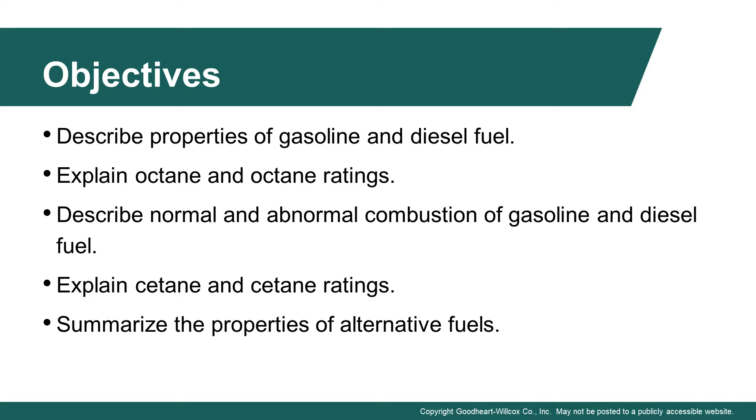So fuel, what is this stuff, right? Automotive fuel is any substance that can be burned to produce heat energy, and almost any substance will burn and give off some kind of energy. It could be a liquid, a gas, a solid. You can think of different examples of this as liquid gasoline, and then some of the explosive materials that we're even aware of, not that we run many cars off of dynamite.

Most passenger cars burn liquid gasoline. This is the most common method. And then we have quite a market that consume diesel fuel. We have a large trucking industry that operates on diesel. We have something called Gasohol, and we have alcohol and other alternative fuels, such as you might have heard of propane, for example, that some vehicles are powered with.

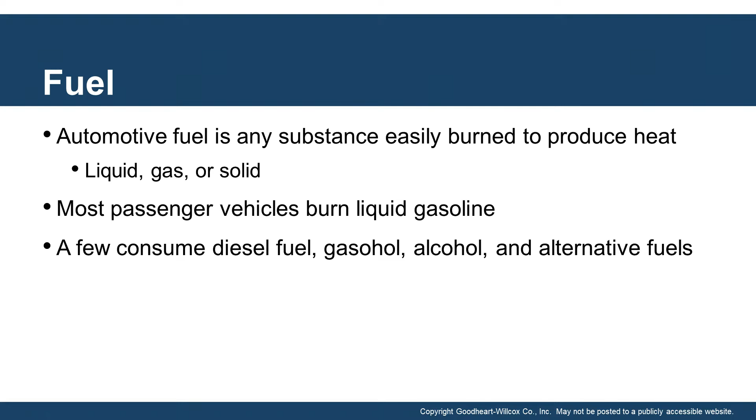There are three main areas that we want to focus on, and the first one would be combustion, and that's that reaction that occurs when the fuel is burned with an oxidant, or oxygen in our case, and this usually happens in that combustion chamber. Now there's normal combustion, right, which is primarily a factor controlling good fuel economy. The best normal combustion usually means we're getting the maximum power out of whatever we've used as a fuel source.

And at the same time, we want to have low exhaust emissions that can also serve a long engine life. We don't want to use, like I mentioned before, dynamite as a joke, but honestly, while it gives off a lot of power, it would be hard to control and would be damaging. There is abnormal combustion, and that occurs when combustion happens either too quickly or too slowly. And you might have heard this before about cars that make these funny noises, sometimes referred to as pinging in some cases.

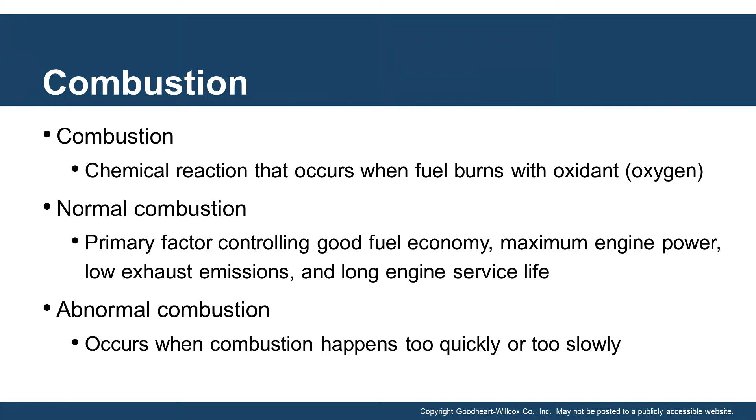The next part that we need to talk about is combustion efficiency, and that's a measurement of how well combustion consumes the fuel's heat energy. For maximum cylinder pressure, right, we get that propulsion down the road, but we want the minimum exhaust byproducts, which cause pollution, which obviously in California is a big deal.

Understanding the factors that affect this proper fuel combustion to isolate many of our vehicle problems is a fact that most technicians need to deal with. Being able to understand what the different exhaust gases tell us a lot about what's going on in that combustion chamber, whatever's coming out the back, right? Sort of like that garbage in, garbage out. If we got bad combustion, we're going to have bad pollution.

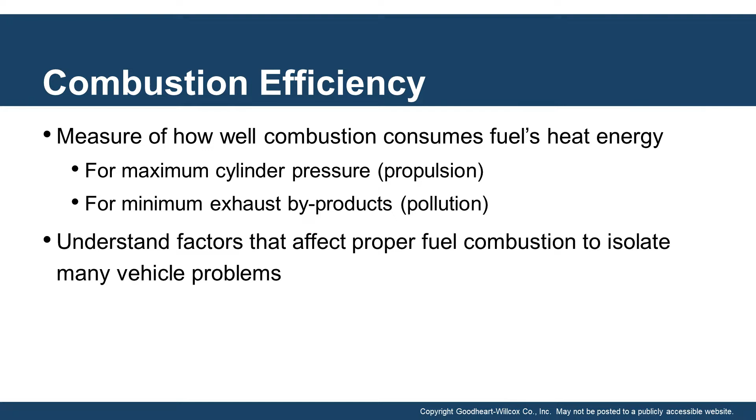So let's talk about our most common type of automotive fuel, gasoline. Gasoline is highly flammable. I'm sure that most of us have had some experience around gasoline. And on top of its flammable characteristics, we have to try to control that. And we do that by using what they call anti-knock additives. And these are designed to slow down the burning of gasoline and help prevent engine ping or knock.

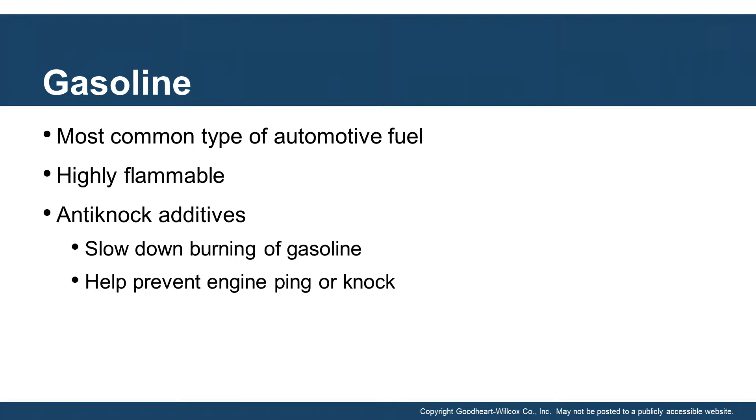And this is where that octane rating comes in, because this tells us a lot about how, I guess, volatile the gasoline is, if it can be controlled to a certain temperature. Obviously, the more additives that we put in, there's an additional cost associated with it. And this brings us to the gasoline octane ratings that we need to understand.

So there's an octane rating, and that's the measurement of the fuel's ability to resist knock or ping. And the octane is one of several flammable hydrocarbons that forms during the refining process. High octane gasolines resist knock and they resist ping better than gasoline with low numbers.

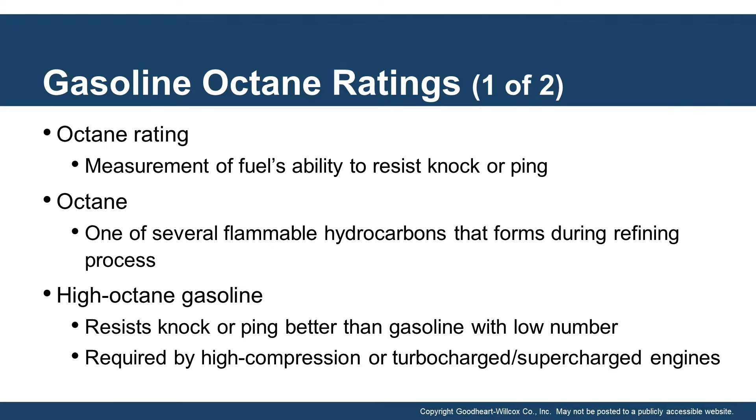So it's required by high compression or turbocharged, supercharged engines, because as we increase pressure, especially in those turbocharged and supercharged, we're going to increase the temperatures, and those temperatures can cause gasoline to go off at different levels. So the higher the octane, the more certain we are at what temperature it will burn, versus a low octane that may go off at a lower temperature or a higher temperature and can cause problems within the engine itself.

So those low octane gasoline numbers that we see here, those are suitable for normal compression, high efficiency engines. Automakers will recommend the specific fuel octane ratings for each vehicle. And really what that's doing is it's trying to help us control where that flame will go off.

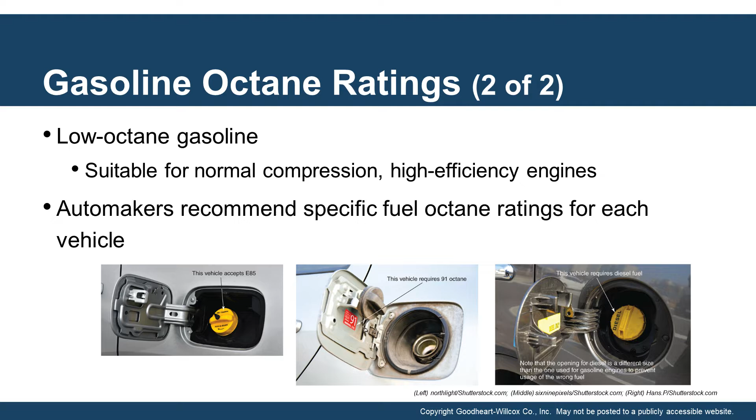In other words, we use a spark plug, but if we've got too much pressure and the heat elevates higher than that, that gasoline can go off before we get to top dead center, which is going to adversely affect our ignition timing. We may be trying to hit a certain point where we want the gasoline to be ignited, but it may unintentionally be going off sooner than what we wanted, or it may not even be burning as hard as it should. This is where that octane rating plays such a critical factor in what the vehicle was designed to operate on.

Another important part of the gasoline combustion process is how gasoline must mix with the right amount of air to burn properly. You'll often hear this as a stoichiometric ratio. And this is basically 14.7 parts to 1. But what does that mean? That's 14.7 by weight to 1. So in other words, 14.7 pounds of air to 1 pound of gasoline.

This is a volatile air-fuel mixture that must be compressed, pressurized, and then ignited. This creates the perfect storm for this fuel mixture to go off, resulting in combustion or a rapid oxidation that produces heat and the expansion of gases and ultimately engine cylinder pressure, which is what gives us that propulsion down the road.

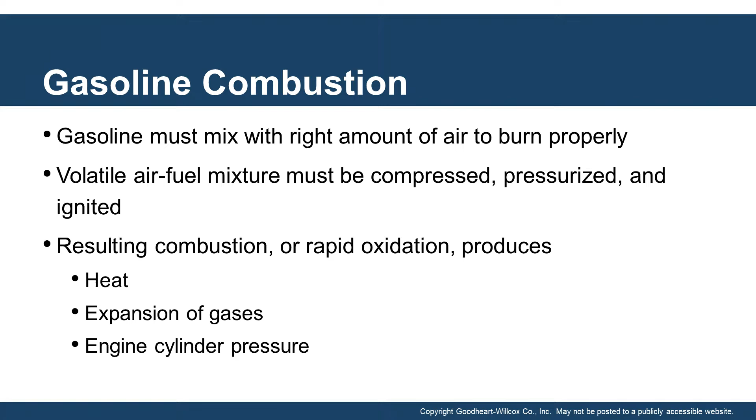Normal gasoline combustion happens when the spark plug ignites the fuel and creates the burning process. We've got this pressurized air-fuel mixture, and we light it off with this quick flick, very similar to a Bic lighter, but under a lot more pressure. It takes only 3/1000ths of a second to start this ball of flame rolling, and that gradually expands as it burns more of that air-fuel mixture as it comes up to TDC, which is going to be timed at the perfect point to push down on that piston.

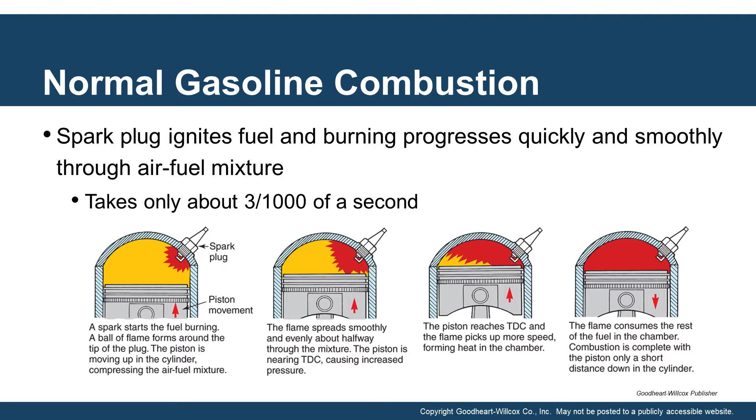You'll find that some cars actually will fire this spark plug up to 3 to 4 times in one cycle just to constantly be lighting off that flame, especially noticeable with direct injected gasoline engines that you'll learn about later. Those fuel injectors are able to keep adding fuel during the whole power stroke, which is why that makes them so incredibly strong for pushing vehicles down the road.

This air-fuel mixture is that stoichiometric fuel mixture I was discussing. This is chemically correct. This is that air-fuel mixture that we're looking for. And for gasoline, that's 14.7 to 1. 14.7 parts air to 1 part fuel by weight. Always remember that it's by weight.

A lean air-fuel mixture is a large amount of air compared to the amount of fuel. So if we had 15 to 1, that's more air than what's desirable. If we had 16 to 1, that's even more air than what we want to fuel. A rich air-fuel mixture is a large amount of fuel compared to the air. And in those numbers, maybe we see 14.7 to 1.8 or 14.7 to 2. There we've got too much fuel for the air mixture, and that's not going to give us the best potential power or efficiency out of that cylinder.

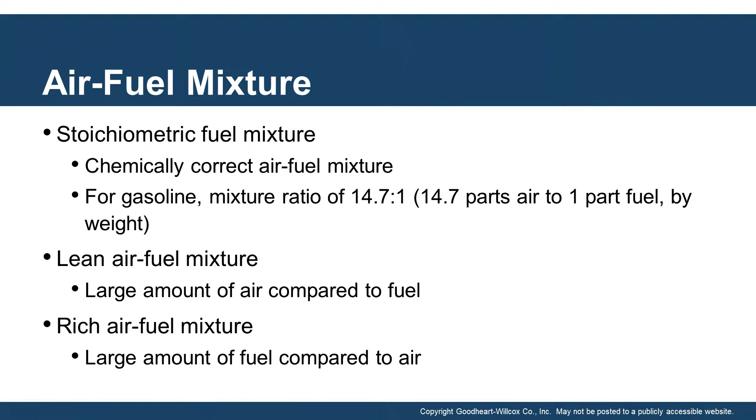Let's talk about abnormal combustion for a second. There's a lot of things that can lead to this, but this abnormal combustion happens when flame does not spread evenly and smoothly through the combustion chamber. This is particularly problematic with those low octane gasolines that can have variations in the fuel quality.

This problem is made more common when we're dealing with lean air-fuel mixtures, especially with direct injected. This is a very difficult thing to control, which is why we use such a high pressure fuel system in direct injected vehicles. There's high operating temperatures that'll also lead to this. When we have too much temperature in there, we can have pre-detonation.

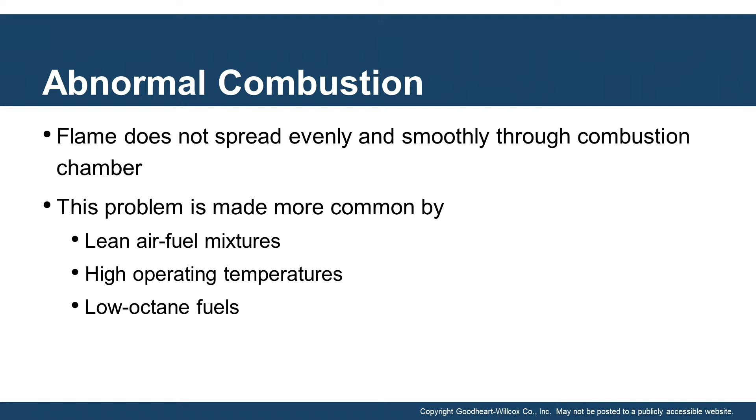These low octane fuels, I already mentioned a couple of times, but I can't stress enough how they are usually a culprit to some of this pinging and detonation for most vehicles that just aren't designed to run on it. You'll see detonation happen when a part of an unburned air fuel mixture, the end gas, explodes violently. This could happen at any point, and the engine knock is a symptom of detonation.

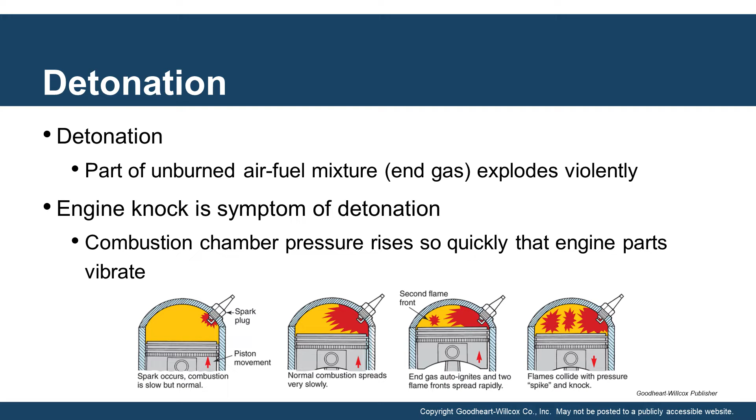That knocking is because in one part of the piston it has ignited harder than it should have and caused the piston to rock within that cylinder bore. That combustion chamber pressure rises so quickly that engine parts vibrate because of that abnormal detonation going on. This detonation can get so bad that it can damage components within that combustion area.

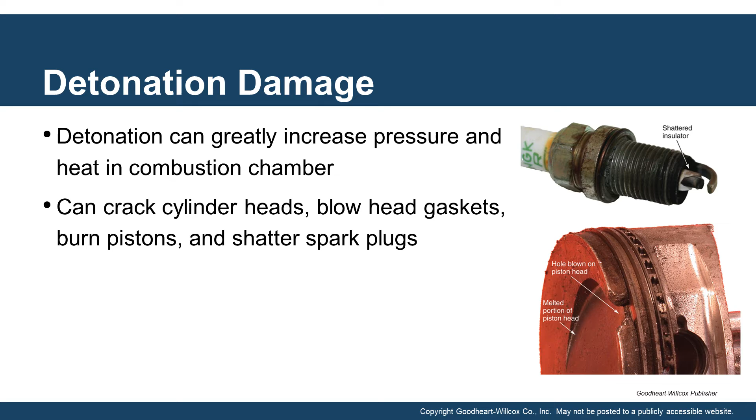That's a greater increase of that pressure that happens, and the heat in it exceeds the design tolerances of that vehicle. It can crack cylinder heads, it can blow out a head gasket, it can burn pistons, it can even shatter the spark plug ends. So it's important that we pay attention to this detonation to prevent this kind of serious internal engine damage from happening.

Preignition or surface ignition is another condition that we need to be aware of. This is usually caused by those overheated surfaces in the combustion chamber that ignite the air fuel mixture, especially if there's carbon buildup on the top of the piston head. This carbon acts much like a piece of charcoal in the grill and will stay there glowing as fuel is being injected into the cylinder. And while that stays hot on the top like a piece of flickering ash in the air, it's just enough to light off that fuel mixture.

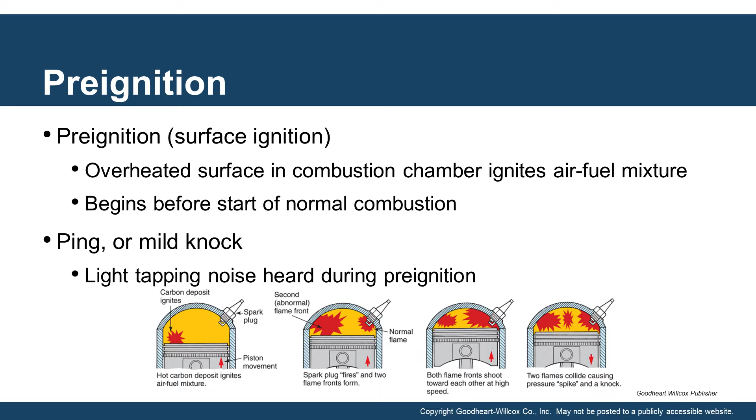And this causes that whole combustion cycle to start before it should in normal combustion, which can lead to this pinging and knock or light tapping noise heard during pre-ignition. This can also result in what we call high NOx values for pollution. So something to be aware of is that carbon buildup is going to increase pressure in that chamber and therefore create heat.

We also have something called dieseling. Dieseling is when you shut an engine off, it's called run on. It keeps running. It may run and shake and shut off harshly. Some cars won't shut off at all. The engine keeps running after the key is turned off, and that's because the gasoline engine ignites fuel from heat and pressure that's already generated.

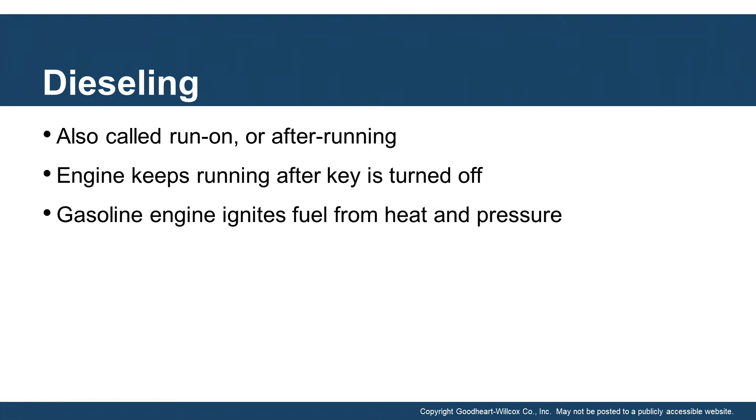They call it dieseling, even though it could happen on a gasoline engine. That doesn't make sense because a gasoline engine doesn't run on diesel. Well, dieseling happens because the top of the cylinder head has gotten so hot that when a little bit of fuel gets in, it lights it regardless if the ignition spark has been shut off or not. And that's how it gained that term dieseling, because it starts to sound very rough like a diesel engine.

We also have another condition called spark knock, and that's when spark timing that is too advanced causes combustion pressure to slam into an upward moving piston. So this piston's moving up, but the combustion process has already started and is starting to push back on that piston that's coming up, and it really wants to be on the downward swing. That causes pinging under load and is actually fighting the system as far as efficiency of moving the car down the road, because you've got cylinders pressing back against other cylinders because it's starting too soon.

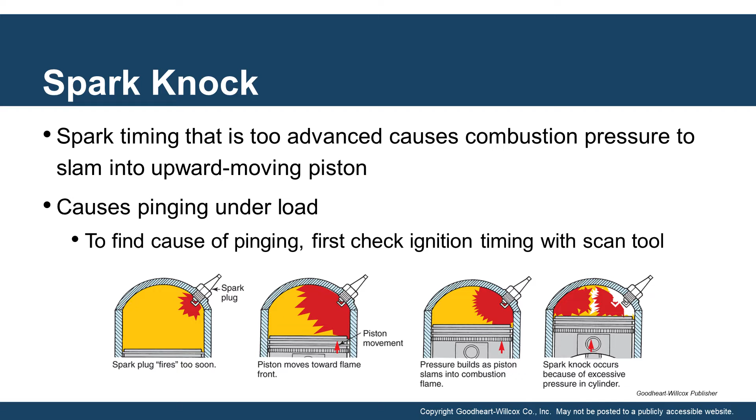To find causes of ping, we first need to look at our ignition timing with a scan tool, and we have to see, is there some reason that this should be starting early? If we see that our timing's okay, we may want to look at something else, maybe that carbon buildup that's holding that contained heat and therefore resulting in that pre-ignition. While this is not as common as some of the others that we've talked about, it does indeed happen if the timing is incorrect.

Diesel fuel is thicker fraction of the crude oil, right? And so a gallon of diesel fuel contains more energy than a gallon of gasoline. There's a tremendous amount of energy in diesel fuel, but it doesn't vaporize as easily as gasoline, and combustion requires fuel to be in a vapor state. So in order to do this, we usually have to use a high pressure injection system that sprays the fuel into the combustion chamber to force this thicker fluid under high pressure to atomize in the air so it'll actually burn better. Actually, if it was too thick, it would not light.

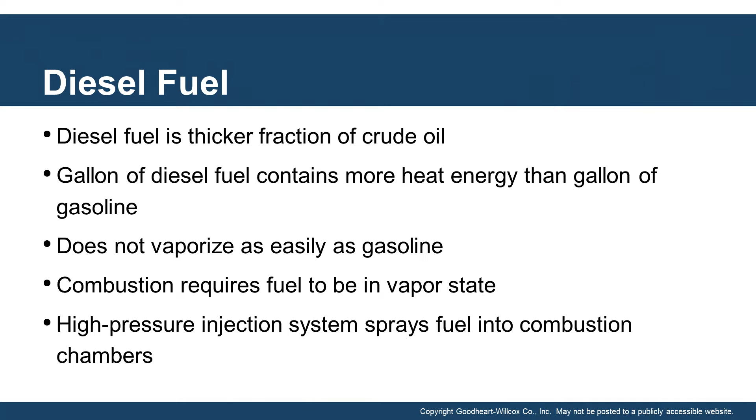And you can imagine this. It's the same thing with gasoline to an extent. You could have a fire in a puddle of gasoline, but it's actually the vapors that are super dangerous that light for us.

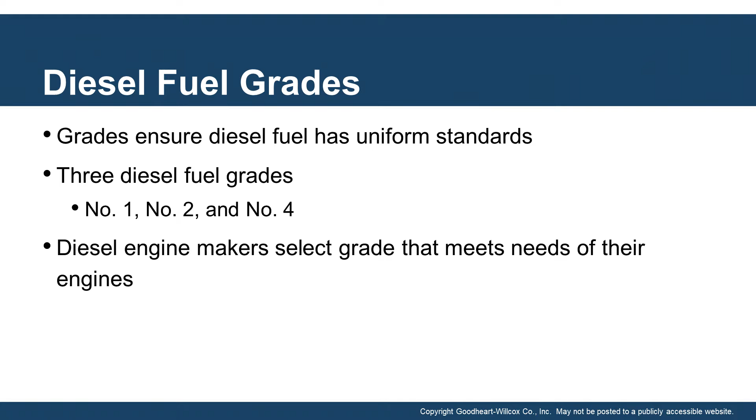Now, when we talk about diesels, diesels have some similarities to gasoline in that they do come in different grades. Grades ensure that diesel fuel has uniform standards. Three diesel fuel grades: there's number 1, number 2, and number 4. Diesel engine makers select the grade that meets the needs of their engines. It's very important that we pay attention to vehicles that are diesels and we use the proper diesel fuel for that vehicle to keep it in best operating condition.

Something to be aware of with diesel fuel is what they call a cloud point. And this is a paraffin wax. That's a substance that is in diesel fuel. And at very cold temperatures, the wax can actually separate from the other parts, and the fuel will turn this cloudy or milky color. That cloud point is the temperature at which the paraffin separates from the diesel fuel. And this is an important factor, especially if you live in a cold climate.

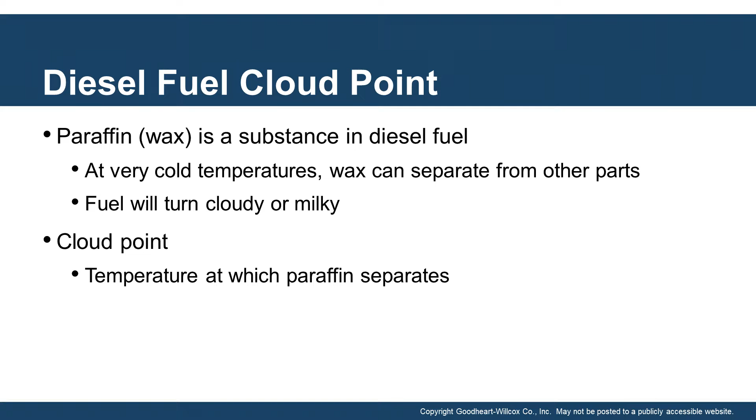Another factor to be aware of with diesel fuel, although it does happen with gasoline as well, is water contamination. The water contamination is common with diesel engines, and the water mixed with the diesel fuel can clog the filters and actually causes corrosion of components. These vehicles will typically have a water separator that prevents water damage, used on many late-model diesel systems.

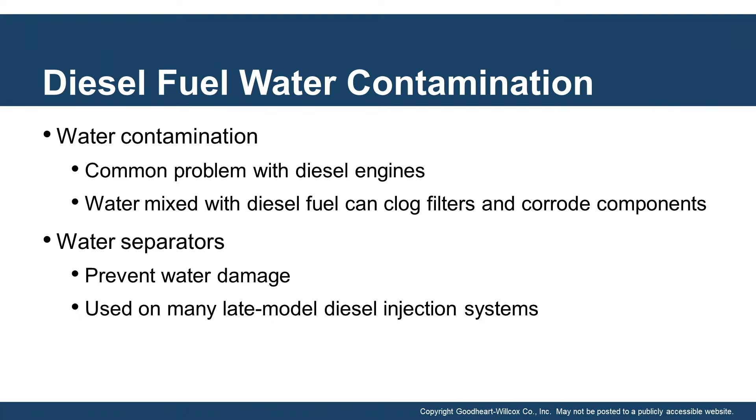One thing to be aware of with this is that fluids like water do not compress. And if you get too much water into a cylinder, you can do something that's called hydrolocking an engine. This can be very dangerous because if fluids don't compress, something's going to give, and this usually will lead to total motor failure of some sort. There are substances that we can add to both gasoline and diesel vehicles to try to help with this water contamination issue. But just be aware that this is fairly common with diesels, and we have tests for it as well.

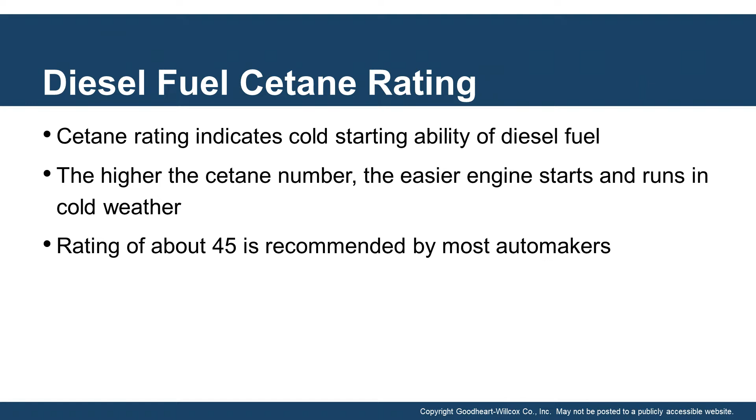There's also what they call a cetane rating that indicates the cold starting ability of diesel fuel. Now, diesel fuel, because it's thicker than gasoline, when it cools down, it acts very similar to oils, which themselves get thick in cold weather. So the higher the cetane rating number, the easier the engine will start and run in cold weather. This can be extremely important with diesels. It's also very important when we're dealing with diesels that we're looking at the oils that we're putting in them, because normal oils will act up in cold weather and create a very tough condition for diesels to turn over. A rating of about 45 is recommended by most automakers.

So diesel combustion is quite a bit different than that of a gasoline. Compression ignition is what we call the engine that compresses this air until it gets hot enough to ignite fuel. The diesel fuel is thick and difficult to ignite, so we want to put it under high pressure to cause this atomization. The fuel is forced into the combustion chamber through this direct injection process, and this extremely high compression ratio heats the air in the cylinder. The fuel is sprayed into the hot air and begins to burn immediately as it sprays into that diesel engine.

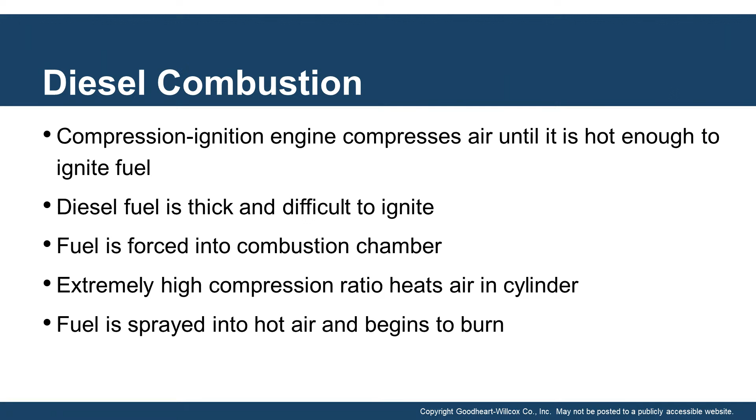This is sometimes a difficult concept to understand, but when that amount of air is put under that kind of pressure and friction and it's compressed and you're adding that fuel, that's going to cause heat. Anytime we have pressure, we end up having heat, and that is going to cause items to combust to some extent.

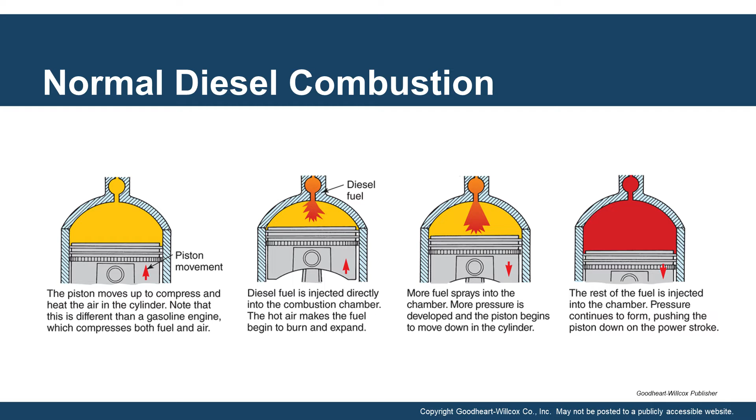Now, when we look at the process of the normal diesel engine, you can see the piston moves up and it's compressing and heating the air in that cylinder. And in this case, we have a little ball at the top. And that is where the diesel fuel will slowly be squeezed out into the combustion chamber. And passing through that orifice creates this heat. That fuel, as it comes down into the combustion chamber, will start to ignite and therefore will start to build up pressure as it expands and burns.

One of the newest items that we've seen in the development of diesels has to do with what they call a selective catalytic reduction system, better known as an SCR cat. That automatically sprays diesel exhaust fluid, often referred to as DEF fluid, into the exhaust system. This is a mixture of urea and deionized water. And the catalytic converter breaks down toxic NOx emissions by using this deionized water and urea solution. The rate of the DEF consumption is termed what they call a dosing rate.

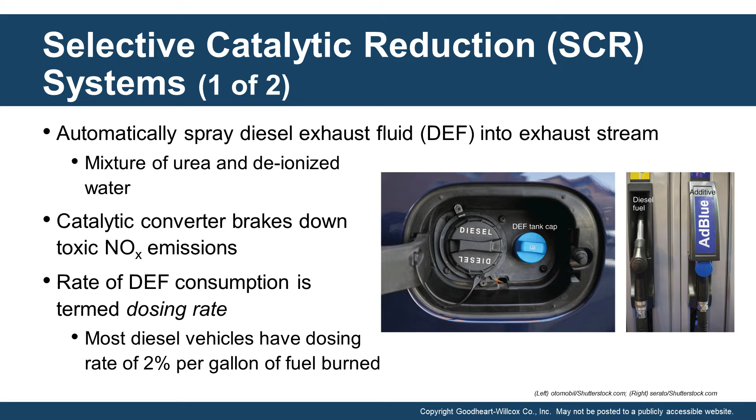That's how much actual urea and deionized water is being entered into this SCR catalyst. And it's often referred to as burn off. Most diesel vehicles have dosing rates of 2% per gallon of fuel burned. So something to just be aware of. Typical maintenance will require that we fill this.

The EPA requires vehicle manufacturers to install safeguards to monitor this system. When DEF fluid is low, a warning indicator illuminates, and it can actually limit the amount of starts that you have and tell you you've only got 20 starts until the vehicle won't start anymore. So they take this pretty serious.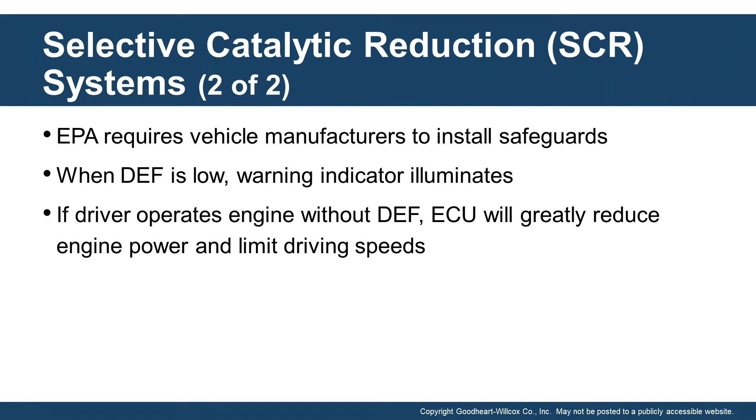If the driver operates the engine without the DEF, the ECU can take action. It can cause a significant reduction in engine power and even limit the driving speeds. And not only that, there's cars that simply just will not start until that has been filled and set. And that's to prevent people from skirting the law, let's say, and not adding this fluid to reduce those NOx emissions.

So gasoline and diesel we've kind of gone over, but what about some of these alternative fuels? We have a lot of different fuels that have been tried. We've got liquefied petroleum gas, we've got biofuels, we've got hydrogen vehicles, there's fuel cell vehicles. Propane was very popular. Obviously, we all know electric vehicles are growing. There's natural gas and what they call P-series fuels. All of these have some application that have been experimented with to try to find the best model for the longest efficient use of fuels.

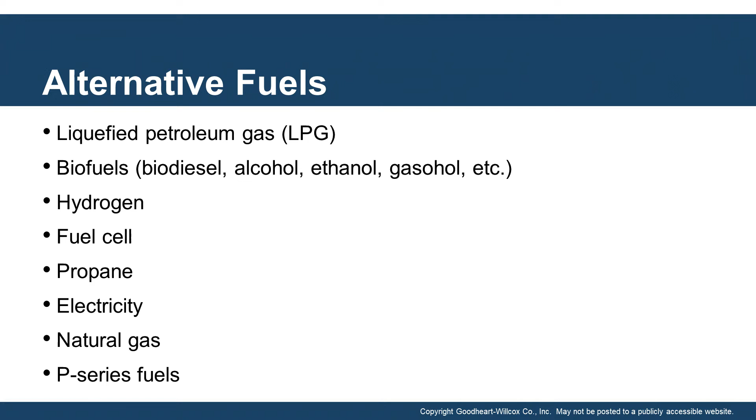We've seen a lot of things where corn alcohols for a while were very popular. And then sometimes they were developed as far as they could be, and they just couldn't get the efficiency out of them that was desired. We're still seeing a lot of growth in the hydrogen industry along with the electric right now.

The liquefied petroleum gas was very popular for a period of time. This was used in a lot of our buses and so forth for public transportation. It was used on both automobiles and trucks, and it was one of the lightest fractions of crude oil that's out there. It's very similar to gasoline, but this is a vapor at room temperature and usually at pressure. So this usually requires a special fuel system.

Any of you that have run down to get your barbecue grills filled understand that they have to inject this propane into a tank under high pressures. That is a gas, and often it's accompanied with a foul odor that lets us know if there's a leak.

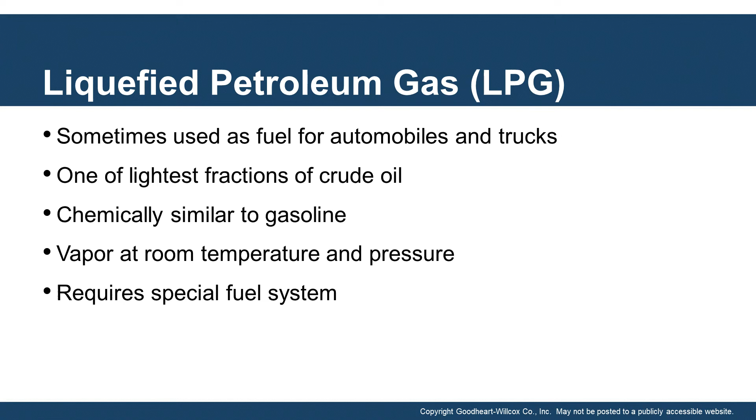So biofuel vehicles look very similar to traditional cars. You'll see here that they pretty much have an engine in there, they have an ECM, they have the 12-volt system and transmission. What may be different on a lot of these is you'll have some kind of float assembly in the tank. And that float assembly usually is very special. It's not only measuring the level of the fuel, but it's also determining what percentage is there.

So a lot of these cars you may find that run on pure biofuel, or they may run on a combination of gasoline and some type of biofuel. And that's going to affect how that fuel burns in the engine. This sensor that's back there is able to determine that. And then from there, it's able to tell the engine, hey, this is how you need to adjust the timing rate.

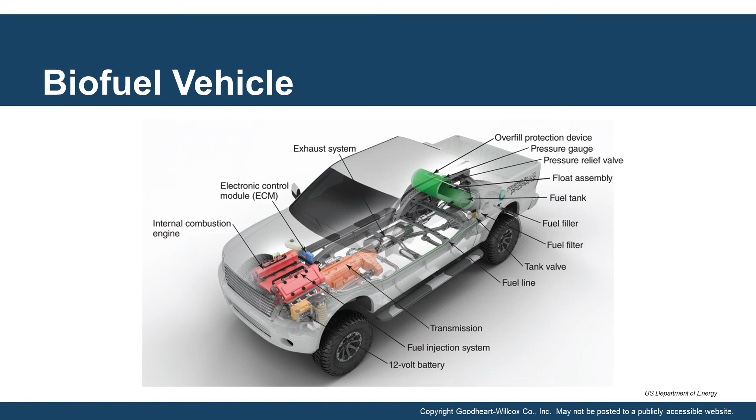If it's a propane system, you may see something in there that's got a pressurized tank. And all of these systems pretty much work under similar conditions depending on what the fuel is that's being used in the vehicle to try to expand its efficiency.

Biofuels are considered renewable, and some biofuels recycle waste products, and the crops are planted each season. So for example, with corn, a lot of corn was planted so that we could extract this corn biofuel. There's also been a lot of play with certain types of lily pads and so forth on some lakes that they're able to get some of this energy from as well.

Lots of different ideas out there. It's always interesting to watch what people are trying to use to harness some renewable energy source so that we don't create the carbon footprint that we do under many of our traditional methods.

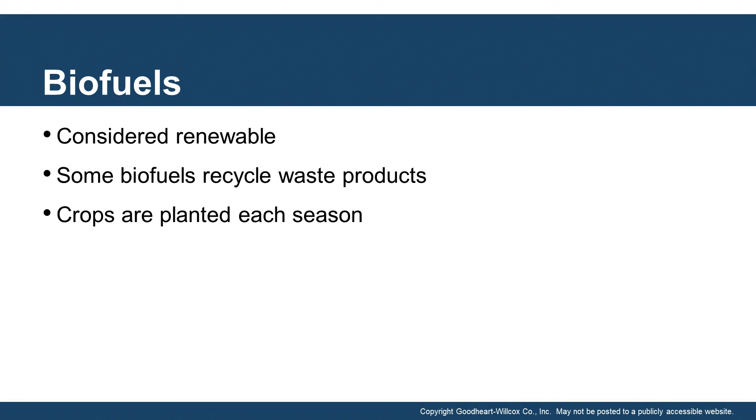So one other type of fuel that's out there is alcohol, and I'm not talking about a beer that you have that you dump down there, but there's actual alcohol that is clean burning, but it's very expensive to use and produce, and engines require serious modification.

There's two types of alcohol that are primarily used today. There's ethanol and there's methanol. In either one of these alcohols, you're going to find that they are extremely clean burning and usually high output style engines.

Funny story about this, my first experience with ethanol, or ethyl alcohol, was with motorcycles. I remember when I was younger going to a track where all they burned was ethyl alcohol. They had very small gas tanks just for racing, but it was an extremely powerful fuel to use for these engines that were designed to burn this type of fuel.

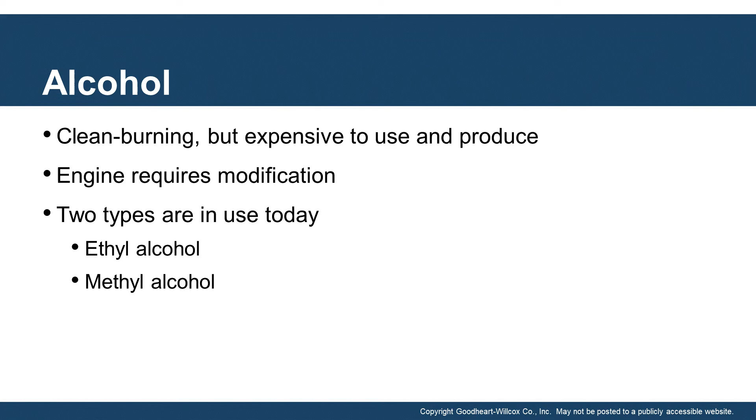You'll also see in many of these systems with ethanol that it's a renewable fuel that's made from corn and other plant-based materials, such as the lily pads I was mentioning. It's colorless, it is toxic, and it is highly flammable. Ethanol is blended with gasoline, and a common blend is E10, 10% ethanol, 90% gasoline. You may have even noticed this at the gas pump, because sometimes they'll list the ethanol blends there.

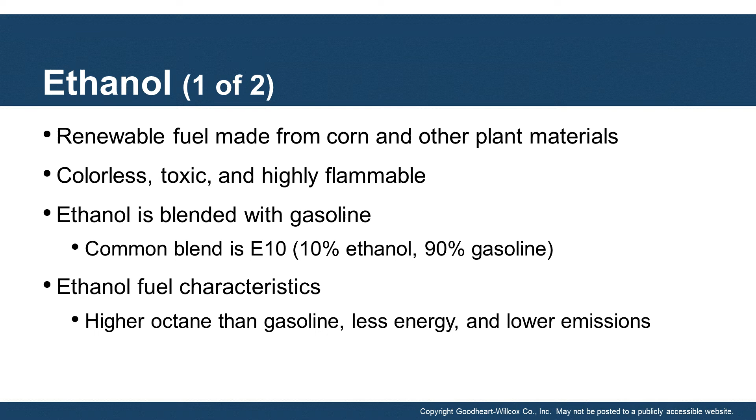Now, ethanol fuel characteristics are higher octane than gasoline, but it creates less energy and lower emissions. So there are some pros and cons to looking at ethanol as an alternative, which is why for a period of time many places were using corn oils and so forth as energy sources, because it was considered renewable energy that we could use.

One other item related to ethanol is that there are sensors that monitor the fuel contents through measurement of combustion efficiency. They look at the flow of fuel through a sensor that is sampled. The engine ECM then adjusts the fuel curve, and the fuel curve is the amount of fuel injected into the cylinder for the operating conditions.

So keep in mind, we can control when the spark happens, when this combustion actually occurs. We can also control the amount of fuel that's going in. And that's why you've seen so many ECMs or electronic components involved in the car. We just have much greater control over various substances and various outputs of the engine. Ethanol may also be called ethyl alcohol, so just be aware that sometimes it goes by both names.

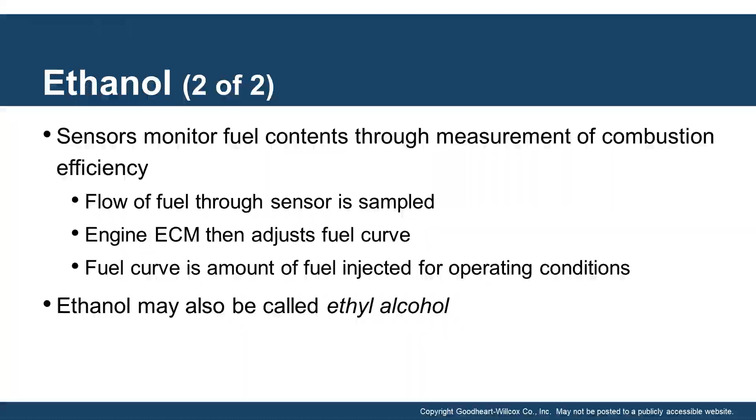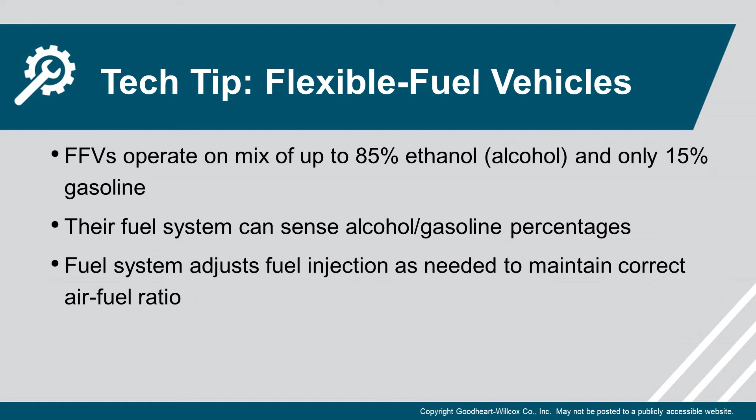Something to be aware of with flexible fuel vehicles, or FFVs, is that they operate on a mix of up to 85% ethanol and only 15% gasoline. Their fuel system can sense alcohol-gasoline percentages, as I was mentioning earlier. The fuel system adjusts the fuel injection as needed to maintain the correct air to fuel ratio. Obviously, this can vary anywhere between 85% ethanol all the way down to 15% ethanol with the other portion gasoline, and the engine has to adjust for these changes.

Methanol is made from wood chips, and it can be made from petroleum, garbage and manure as well. It's colorless, it's extremely poisonous and flammable. It has a very strong odor. It may be called methyl alcohol. You may have heard of this because sometimes people that try to make their own alcohol at home, if they're not careful, can end up creating what they call wood alcohol. And this usually results in causing people blindness.

Methanol is commonly used as racing fuel, and that's because it burns cooler than gasoline, and it does not produce a visible flame if there is a fire. For increased safety, racing organizations have often required additives in methanol racing fuel to make the flame more visible. Nothing like being stuck in a cloud of hot fire that you can't see, right? Very strange behavior with this, which is why they required it in racing.

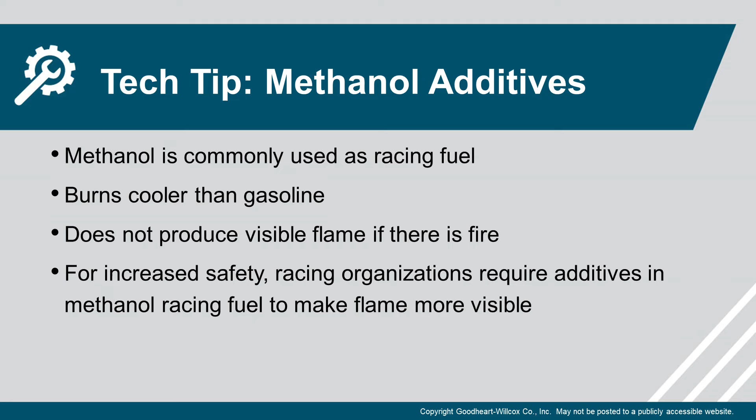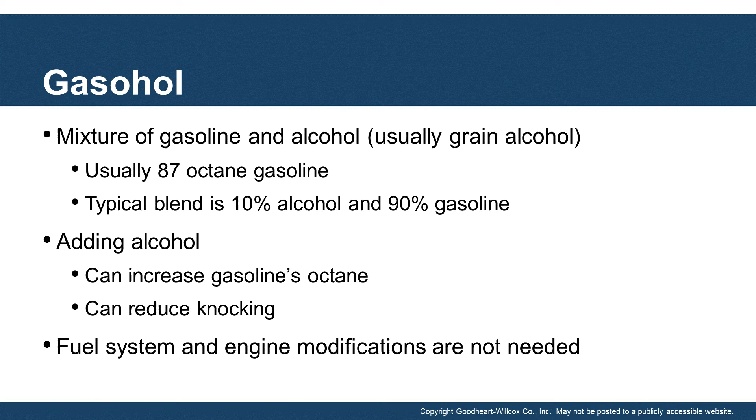Gasohol is a mixture of gasoline and alcohol, usually grain alcohol. It's usually 87 octane gasoline, and a typical blend is 10% alcohol and 90% gasoline. Adding alcohol can increase the gasoline's octane, and it can reduce knocking. Fuel system and engine modifications are not needed for this type of mixture in a vehicle.

Now, natural gas is a clean burning gas that's a non-renewable fuel. There are two forms that are used in vehicles: compressed natural gas, CNG, and liquefied natural gas, LNG. You'll see these in the heavy duty market, especially with some of our buses and public transit systems out there. Those would be the most popular forms of them.

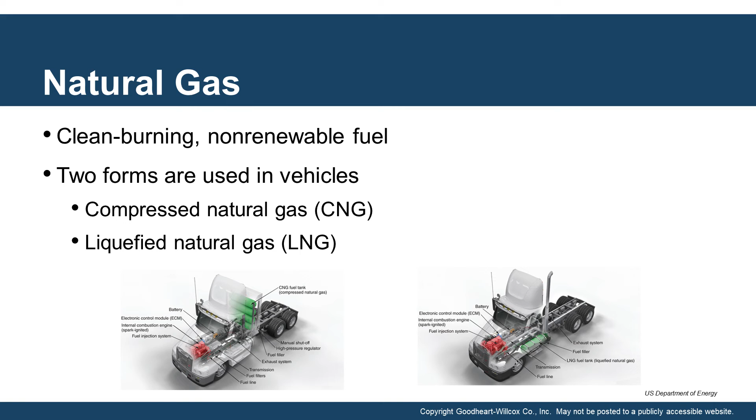Now, hydrogen's one that you've probably heard a bit about. It's expensive to produce and store, and automotive use was limited to test vehicles until recently. They've actually started to mass produce some hydrogen driven vehicles. There are no harmful emissions because the only byproduct is water vapor. You may have heard of the Toyota Mirai. This is a publicly offered and sold vehicle that runs on hydrogen.

Their production method uses what they call electrolysis and ocean salt water that has been developed. They've also used this with combinations of batteries on these vehicles so that they can use this electrolysis to create electricity, which actually helps to re-energize or act as an alternator for recharging the batteries on electric vehicles. It's becoming widely popular and appears to be one of the main fuels to watch in future cars coming out.

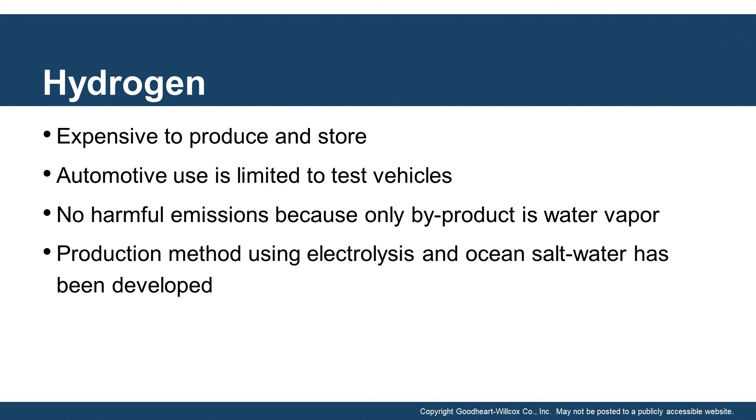These vehicles that you'll see out there are often referred to as fuel cells, and they combine hydrogen and oxygen to produce electrical energy. They use this gas permeable membrane that's coated with a catalytic platinum foil. The membrane is sandwiched between two electrode plates, and the hydrogen gas flows through the anode plate and membrane, and the compressed air flows the other way. This is very much how a lot of our hydrogen vehicles are working today, especially when we start looking at fuel cells.

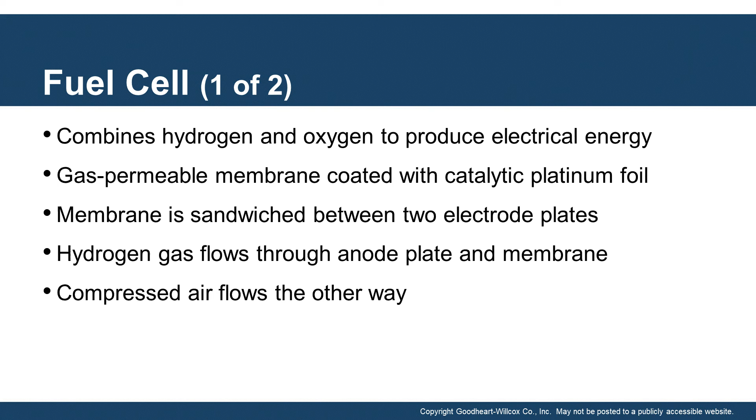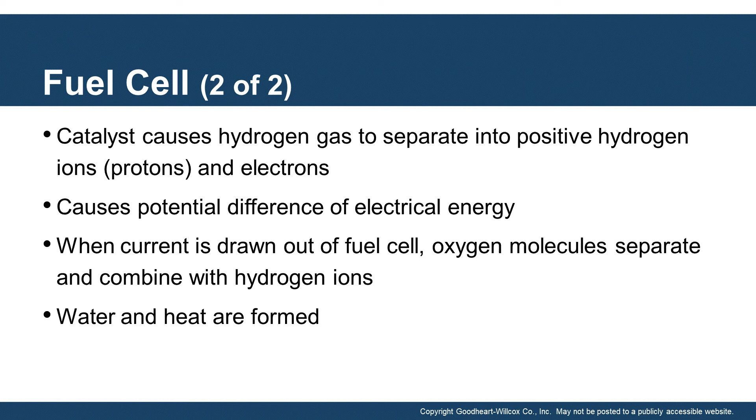The catalyst in these vehicles causes hydrogen gas to separate into positive hydrogen ions, protons, and then electrons that you might be familiar with from our electrical classes. This causes a potential difference of electrical energy. And when current is drawn out of a fuel cell, oxygen molecules separate and combine with hydrogen ions. Water and heat are the two emissions that are created out of this. So literally, out of the tailpipe, you've got drips of water coming out of it.

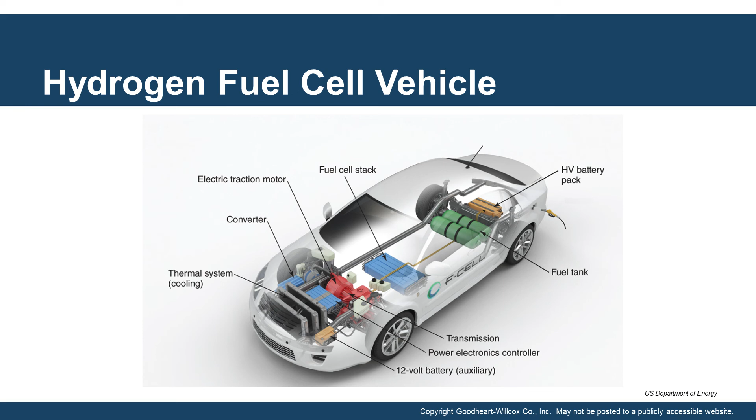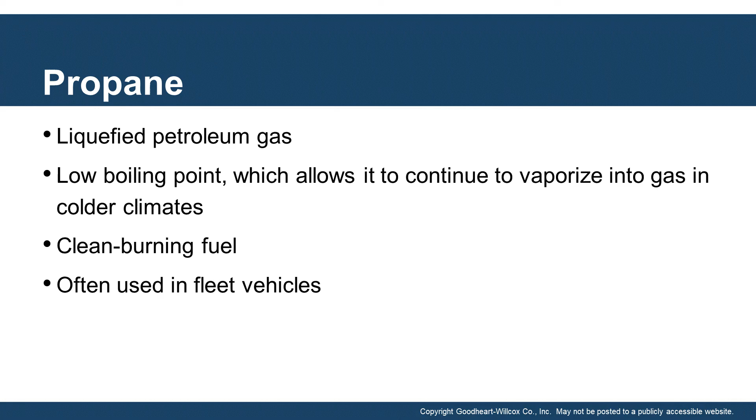Another fairly popular fuel is propane, and that's liquefied petroleum gas. It has a low boiling point which allows it to vaporize into gas in colder climates, so it still is ideal in cold areas. It's a clean burning fuel and it's often used with fleet vehicles. I remember for a long time seeing a lot of our local buses and public transport using propane as their fuel source.

And what can we say here? Electricity. I think this one's gotten a lot of attention in recent months. High efficiency electric motors and large storage batteries are used to power electric vehicles. And you'll see vehicles out there that are 3-phase, 6-phase, 9-phase vehicles to create this electrical propulsion. It's a viable means of propulsion for trips up to several hundred miles.

Again, the range is limited on solely electric vehicles, which is why you're starting to see this hydrogen adaptation occurring, a way to expand that distance. But for the most part, a 300-mile range will get most people typically where they want to go. Imagine you pretty much could drive from here to LA and back on electrical charge. You need to plug these into a recharging station to charge the storage batteries, and you're probably all very familiar with the Tesla vehicles that have these DC fast chargers, they call them, to get those batteries up to optimum levels.

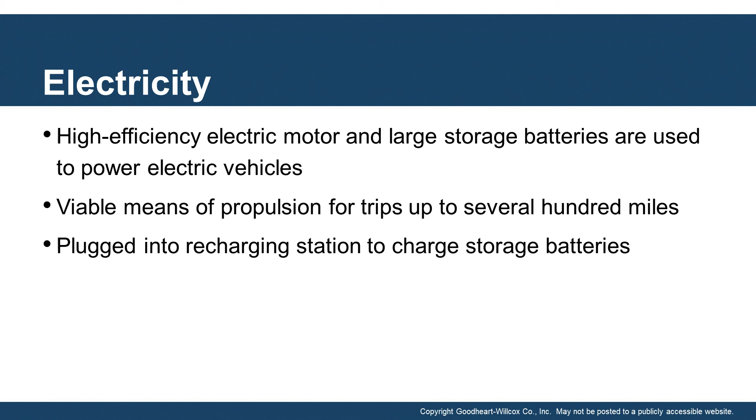Then lastly, we have P-series fuels, and these are blends of liquid fuels. They could be ethanol and LPG, hydrocarbon, a bunch of these different flavors that are added. They're clear, high-octane fuels that can be used in those flexible fuel vehicles. They cannot be used in gasoline or diesel-only vehicles. They have to be used in flexible fuel vehicles, and this usually has to do with the ability to control the timing and control those fuel injectors to give the right amount of fuel for the desired combustion that we want to get.

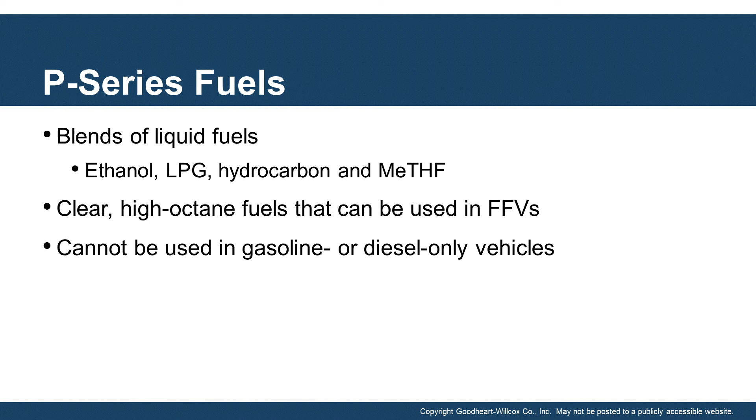All right, so that was a lot of information, a lot of different fuels out there, and I know a lot to absorb, but we've got to get you at least aware of all the different types of fuel sources we're trying to use.